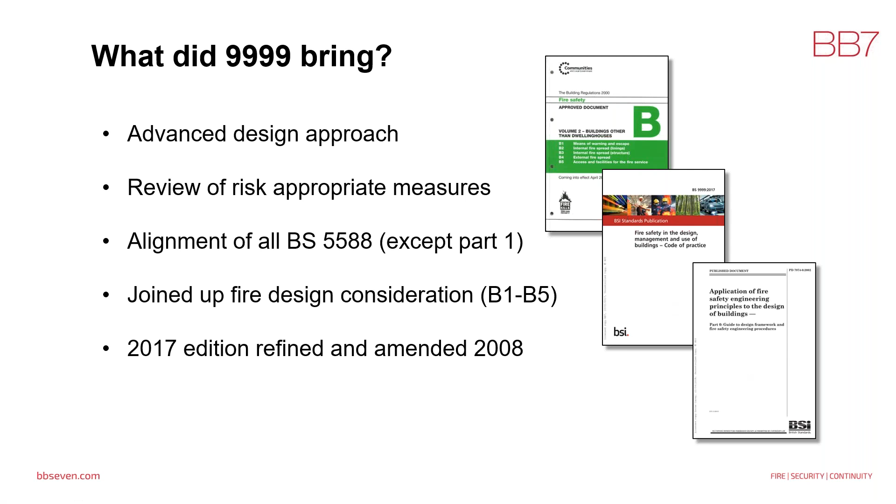So why would we look to apply 9999? There are benefits in applying the document, and one of the most common ones, certainly when looking from a retrospective point of view, which is asked quite a lot, is increasing occupancy within the buildings.

Certainly what the standard did was take into account that the risk of premises aren't the same, which ADB doesn't allude to, certainly within occupancy calculations. So ADB is very different to 9999 in that way.

The standard also gave us better design freedoms, with increased travel distances, smaller escape widths, decreased levels of fire resistance, just for a few examples - there are many within the document. So there are benefits with using 9999 rather than ADB for some buildings.

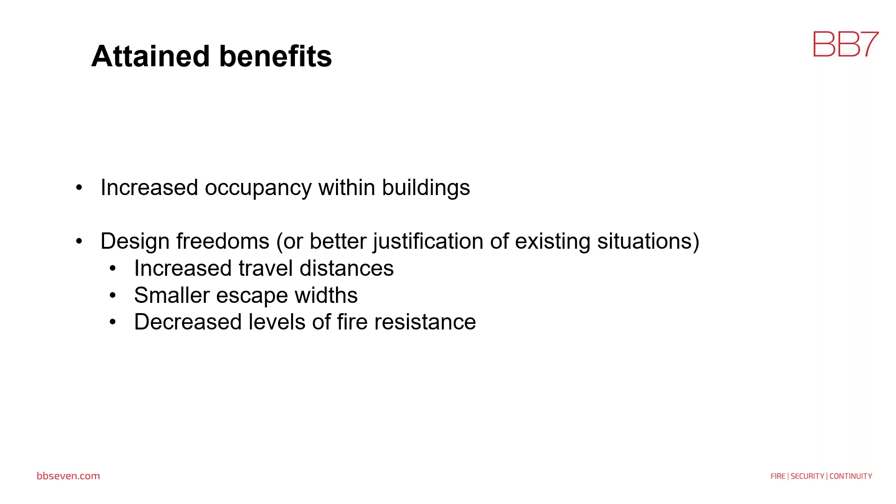So why would you look to do a retrospective application? Well, there's quite a few, but the main ones we tend to come across: there may be an extension or an alteration to an existing building. So perhaps the new design is using the standard 9999, where the previous areas of the building were designed to a previous design standard, such as ADB, and we might be looking to bring the whole of that building under the design principles of 9999.

Perhaps a review of occupancy - in fact, this is probably the most common one which we get asked to look at, particularly when looking at retrospective application. So looking at the increase of occupancy, very common within office environments, particularly in the city, where they want to put more people in the buildings. They'll look at ways in which that can be achieved. One of the most simple ways, without spending loads of money putting in additional escape routes, is looking to use 9999 to review the occupancy of the building as it currently is. There might be some considerations, which we'll talk about as we go through the document, but that's probably one of the most common things we get asked to do a review for.

Change of use potentially - with changing the use to a different occupancy, they might look to use some of the benefits from 9999. Perhaps as an installation of a new system, perhaps a fire alarm or sprinkler system.

Obviously, we know that the standard can give us better design freedoms by utilising those things. So that may be a reason as to why we're asked to look at something retrospectively. But also looking perhaps at existing buildings, like heritage buildings, clearly a heritage building built a long time ago is never going to comply to anything that we've got of today's standard, but using some of the principles of 9999, we might be able to get a heritage building to perhaps look a bit more compliant, shall we say.

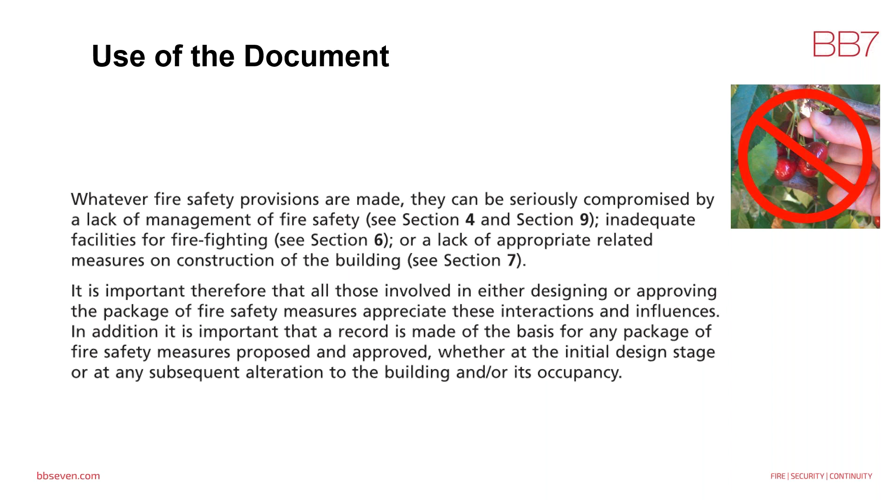Okay, so obviously when we're looking to review a building against 9999, we have to absolutely remember that the key objective here is to satisfy the functional requirements of the building regs and obviously the fire safety order, or other fire safety legislation as it may be in the UK, to ensure that actually we're complying with the law. It's not just about broadly trying to get a building to fit a standard because that works. We really need to understand, is what we do actually complying with the law? That's the key thing, what we're trying to achieve here.

So when we look at the standard then, the first thing really that we should be doing when looking to apply it retrospectively is understand how the building may comply with the baseline provision of what's required within the standard. So the first thing we sort of need to be asking is actually what are we trying to achieve from this review? When we think back to a few slides ago, we're looking at potential reasons why we may have applied this standard. Of course, we need to be thinking, what is the actual thing we're looking to achieve through the purpose of this review?

It may be, as is often the case, as we said, that it might be an increase of occupancy. Well, if that's the case, then the means of escape section is really critical, and that's something we really need to be considering, that everything complies within reason to the document. So it might not absolutely be necessary to have to apply all of the document in all cases. It may not be that a means of escape issue, or the bearing of a reduced or an enhanced level of fire resistance, might have any real bearing on the means of escape issues.

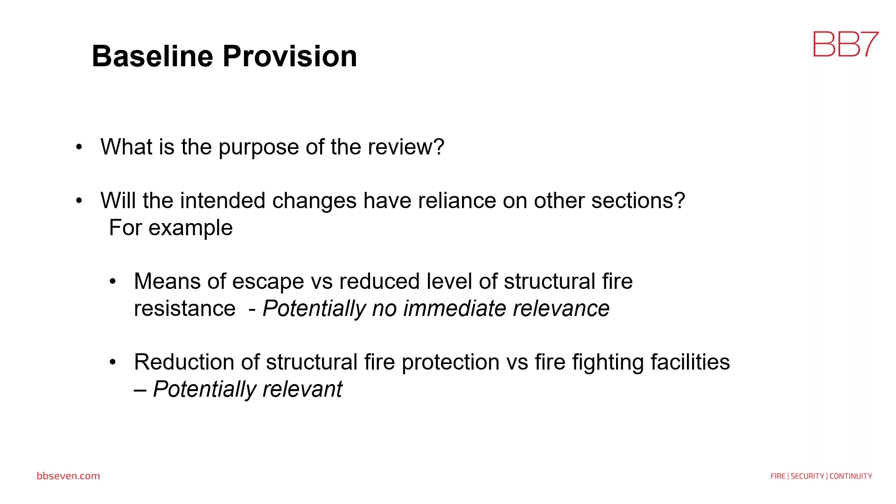But equally, it might be that if we're looking to decrease structural fire protection through a retrospective review, that firefighting facilities could be very relevant, actually. So it's really understanding, again, that interaction between the standards, understanding what the purpose of the review is, and then looking to apply the various areas of the document that are relevant.

Due to time constraints today, we're going to look primarily at means of escape. To go through all of the baseline provisions in the document would certainly take longer than a morning session, so we're focusing on means of escape just now. But you should get the idea of how we're looking to apply the document, how we're looking at it really.

Obviously, those of you familiar with the document will know the first thing you'll look to do is apply a risk profile to the building. How we do that, as most of you are aware, is by looking at what type of occupants are within the building - whether they're awake and familiar, awake and unfamiliar, or asleep, etc. These are some examples of where you may find these occupancy characteristics, but you'd need to assess the building to understand which one applies.

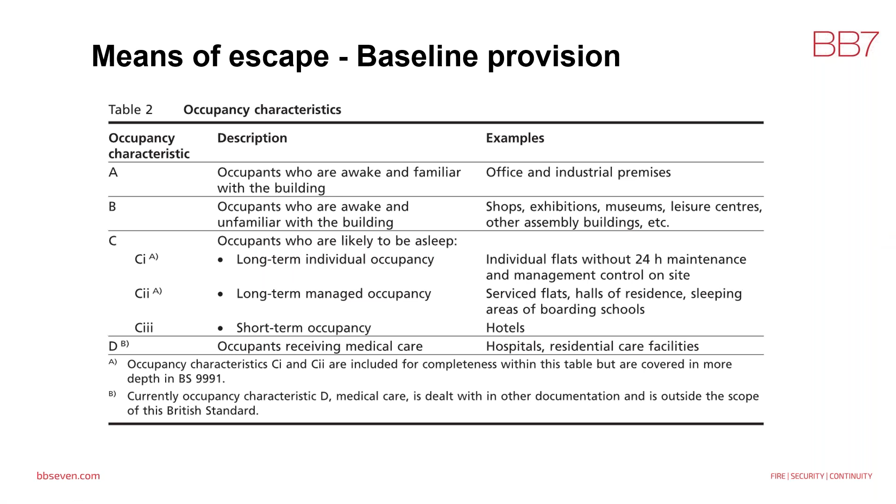Secondly, you look to apply a fire growth rate, 1 to 4, but it's key to note that we don't cover 4 within 9999 - ultra fast fires are outside the scope of the document. So in reality, we're looking at 1 to 3, based on how quickly the fire is going to grow within the premises.

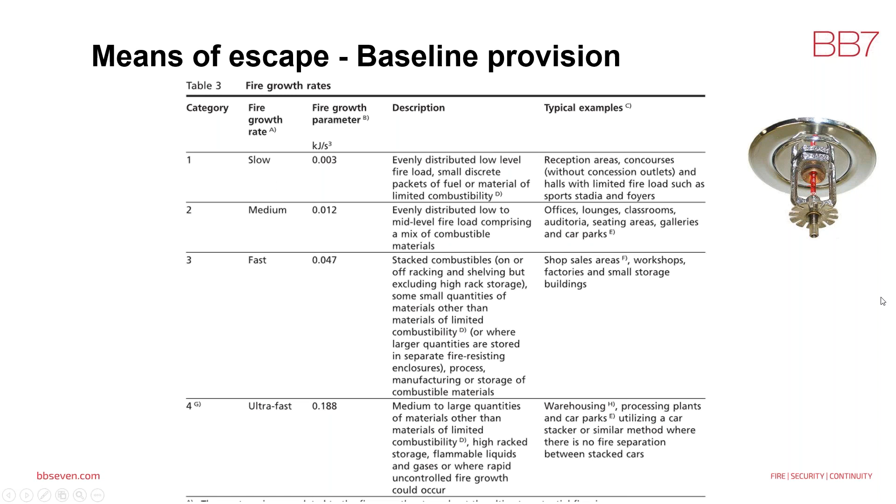The key thing to understand as well is that if the building is fitted with sprinklers - and they should be life safety sprinklers, which was changed in the 2017 edition of 9999 - you will actually drop a fire growth rate. So if you look at an office, for example, which would usually sit at fire growth rate 2, being medium, having sprinklers would actually drop that into a 1, a slow growth rate. So then you'd look at your risk profile here - if you had sprinklers, you drop into the lower category.

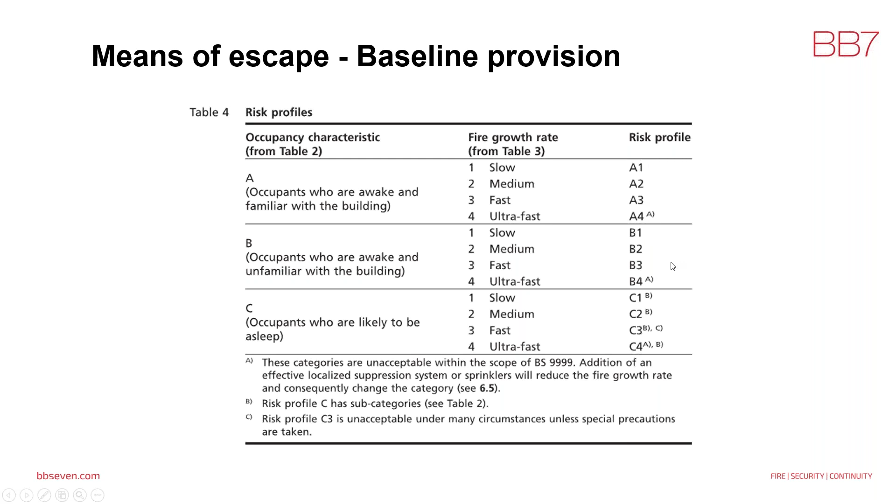What you'll end up with here is a risk profile based on what you've assessed - A1 to A3, B1 to B3, C1 to C3, whatever it may be. But that then sets the baseline really of what you follow through the document.

So the first thing we look at then is the fire detection and alarm system. Now, looking through the risk profile you've already determined, you'll notice that the standard applies a minimum acceptable detection and alarm system standard depending on the risk profile. So for an A1, a very low risk premises for example, a category M system might be perfectly acceptable under the standard. Quite often, in my experience, you rarely find Cat M systems being newly installed now, certainly not the case. But this will provide you the basic minimum acceptable standard required under 9999 - what we're looking to achieve when originally assessing the building.

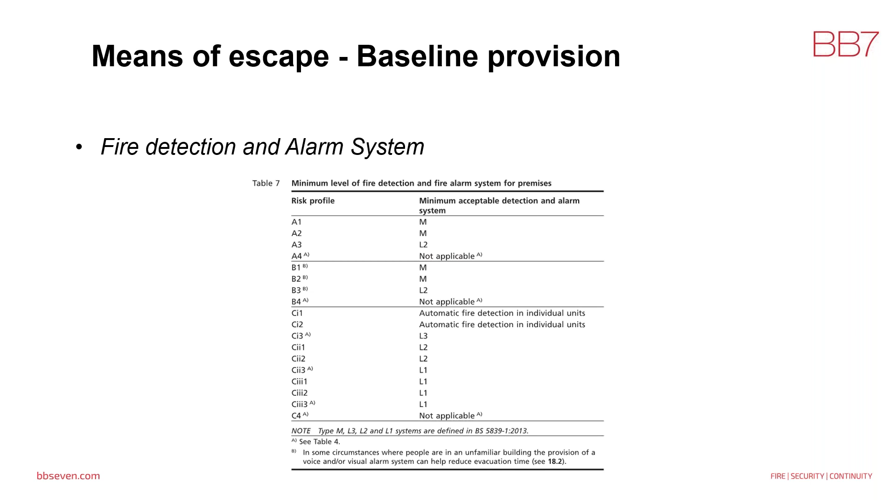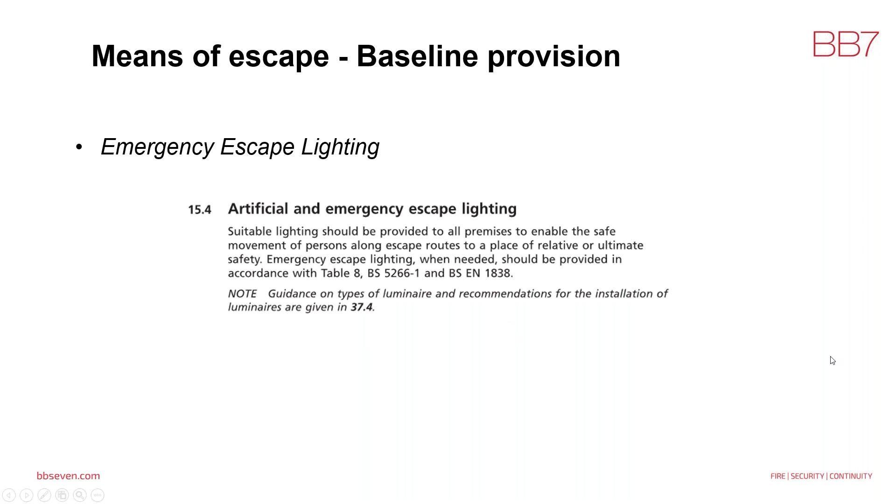Escape lighting, again, I shan't dwell on this too much - it's very, very similar to the requirement within ADB, in fact virtually identical. So it would be to the relevant standard, 5266, that's what you'd be looking for. And same with signs, very simple - any exit signs within the building should be compliant to 5499.

So then we start looking at perhaps door fastenings, direction of opening. Most of these, to be fair, are very similar to ADB, so we shan't go too deep into them, but ultimately all exit doors should be openable without the use of a key. If there are any electronic locks, they should be fitted with overrides to conform to BS 7273 Part 4, so that the electronic lock should fail safe - or fail to open, I should say - on fire alarm operation, loss of power, or a system error. They should also be fitted with a manual door release, the little green boxes to the side.

There are occasions, however, where manual door releases aren't fitted based on a risk assessment, being that the higher risk actually is a security failure rather than a means of escape failure. Something like a block of flats, for example - I know that's not necessarily covered in 9999 - but sometimes it's more favourable not to have a manual door release where it's going to be broken in 10 minutes and that door's going to be constantly open. So there are times where you can suitably justify that a manual door release may not be required, providing the system is configured in the correct way so that it should still fail safe.

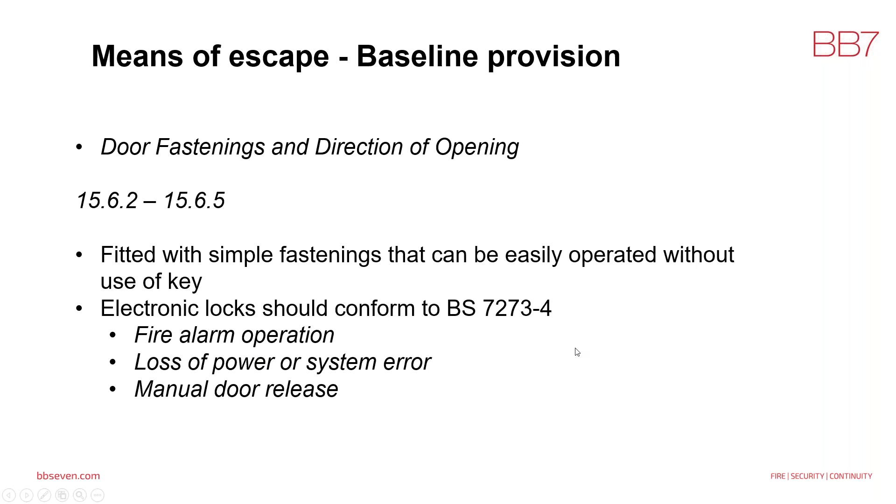Again, very, very similar to ADB. In fact, it's actually identical, I think, to 5.14 in ADB, where we've got door fastenings and the direction of opening of the door - that the door should open in direction of travel when you've got an excess of 60 persons, with the exception of any areas which may have rapid fire development. Now, that's not necessarily intended for kitchens. That's more for industrial areas where you may have very high fire loadings, or contain things such as alcohol or solvents, which might give very rapid fire development, where a quick egress may be required.

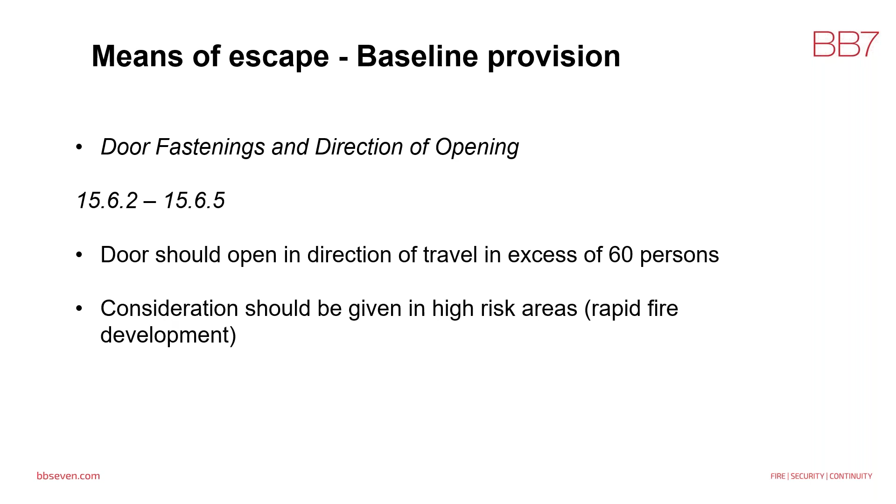So looking at the provision for final exits - again, very similar to ADB - but there are perhaps a couple of minor differences, particularly when we come to merging flow calculations. There are quite a few different examples of merging flow calcs within 9999, but simply, final exits should be sited to ensure rapid dispersal from the building. They should be easily apparent, and sited away from smoke outlets and vents. Sometimes that's a little difficult with existing buildings, particularly in the city, particularly with basement vents, but it's something we try to achieve if we can.

This is something which is slightly different within 9999 - the provision of having, if you have external steps, adequate space outside. So if a wheelchair needs to come through, it can be put to the side if there are other steps to climb, and it won't necessarily obstruct egress until we've got people who can assist to take the wheelchair or the wheelchair user upstairs.

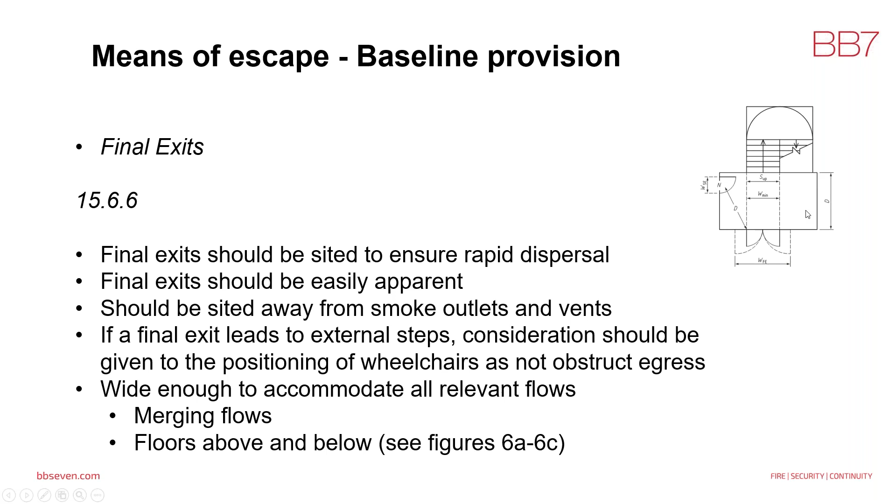Obviously any exits which should be provided, it needs to be able to take all relevant merging flows. There are three different merging flow calculations within 9999 - figures 6A to 6C. I'm not going to run through the calculation process today, but just be aware that they are there, and you may need to apply them.

Again, identical to ADB when we talk about the layout, perhaps the number of escape routes, defining how many people and the minimum number of escape routes you would ever require. That's quite simple - table 10.

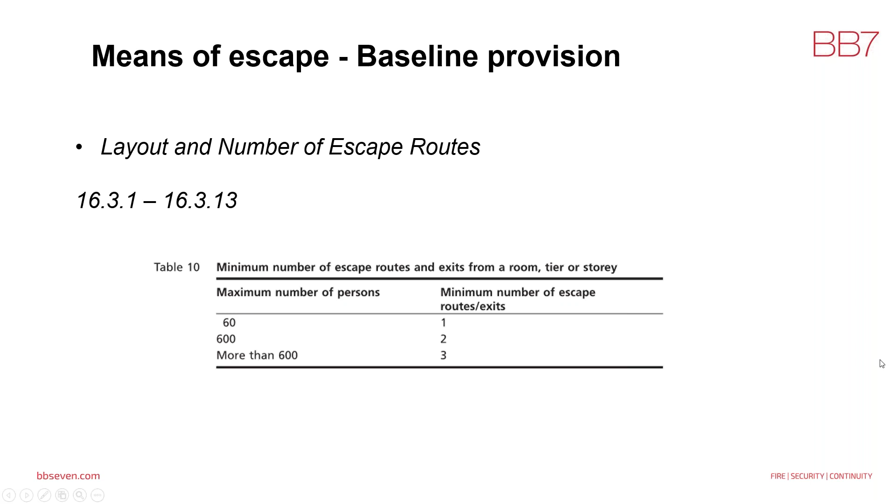This is slightly different - the old 45-degree rule. In ADB, as you know, the 45-degree rule and how it's applied is pretty much measured from the furthest point. If your exits are less than 45 degrees apart, then they should either be separated, made wider, or whatever. But 9999 approaches this slightly differently - something you can do is similar to the old angle of divergence, if anyone's old enough to remember that. What this effectively does is make the angle more acute, if you can combine travel distances. So if the distance between A to D conforms to a single direction of travel, and the overall A to B or A to C is still less than or within the agreed travel distances, then you can have an angle less than 45 degrees. Providing you measure your angle effectively from point D, from B to C, and providing this distance is no more than a single direction of travel, then it is allowable. That is a big difference between ADB and 9999.

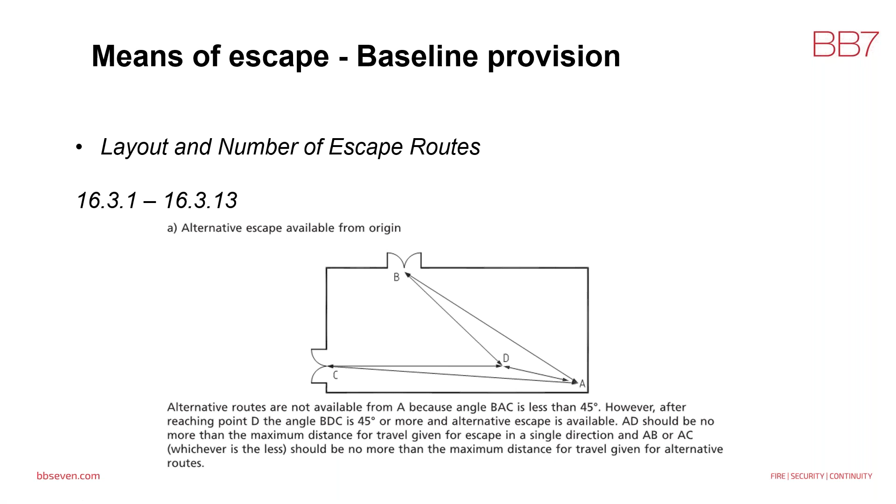I'll brush over some of these because this is quite a big section, but also things that are very similar to ADB. Obviously, a single escape route should not exceed more than 60 persons - we know that. Inner room considerations are identical to ADB, the types of control measures you may have there for inner rooms: detection, vision panels, gaps above walls to ceilings, etc.

Circulation routes as well, we obviously try to keep them away from stairways, exactly the same as ADB. And when we think about different uses and different occupancies, we try to provide different escape routes for different uses and occupancies, meaning really that we shouldn't be having escape routes pass through different occupancies. That's not really the done thing.

Height of escape routes, same requirement as ADB. 9999 gives a bit more description around corridors, about their enclosure, recesses, etc., around subdivisions. So it's quite good familiarising yourself with this area, just to understand if that could be relevant at all to what you're trying to apply it to in a building, particularly with a building you're applying it to retrospectively, are there any deviations or variations from the standard which are going to affect what you're trying to achieve? That's what that's looking to deal with there.

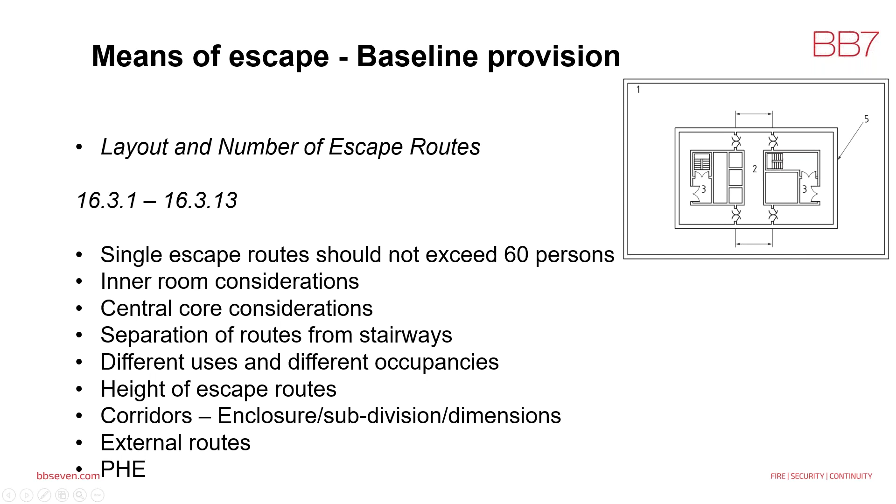Travel distances, obviously, you've spoken about a little bit earlier. Again, I'm sure many of you are very aware that in 9999, they're very, very different to what ADB would be, that they're all based on risk profiles, so having a direct or actual distance, meaning that you can apply the 2/3 rule as you would do in ADB.

So if you're measuring direct, you'd look at 44, or if actual, it would be 65. In reality, in existing buildings, this is the one you're going to be looking at, is the actual distance, actually measuring it. Direct really is only useful for design. So actual is where we're going to be interested, either 2-way or 1-way, just to ensure that they're pretty much within those limits. Again, not absolutely hard and fast, but near enough there.

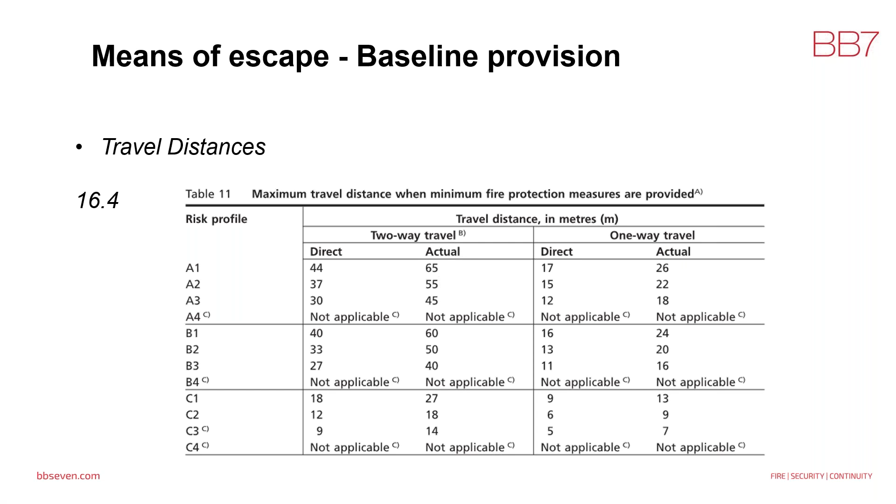Again, if we're looking a bit more at widths of doors and escape routes, again, slight differences here as well to ADB. That's probably the most important thing, certainly that they shouldn't be any less than Table 12, as we'll talk about in a minute. So the escape routes effectively need to be not less than the aggregate calculation within Table 12, which we'll talk about. But they shouldn't be less than 850, where there's a potential of wheelchair access. So it brings in some of the Part M requirements here as well, obviously, which ADB does separate a bit more, but 9999 does think a little bit more about disabled use.

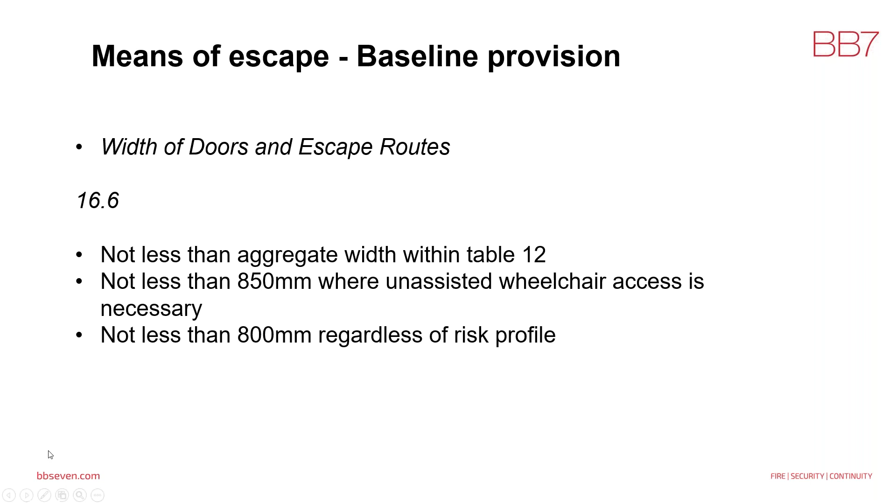Probably one of the most different areas here is this one here. This is quite important. 9999 assumes that every door will be at least 800 millimeters, which, when looking at existing buildings, can be a challenge, actually. Certainly, a lot of the buildings that I've looked at, some smaller office buildings, their doors are often less than 800 mil. So we have to apply a bit of common sense and some engineering methodology behind where we may have doors of 800 mil to see if it's achievable, or do we actually need to widen the door. So this might be a variation which we might have to look at when applying it retrospectively. 800 mil can be difficult to achieve sometimes.

So I mentioned Table 12 here. This really gives you your aggregate exit width. So effectively, where ADB, for example, might apply 5 mil per person, it will apply so many millimeters per person based on the risk profile. So if you've got an exit, obviously we're applying retrospectively, that you might have a 2000 millimeter wide exit, you just divide that number by whatever here you're looking to achieve to know how many people that exit can reasonably take. That's how you look to apply that.

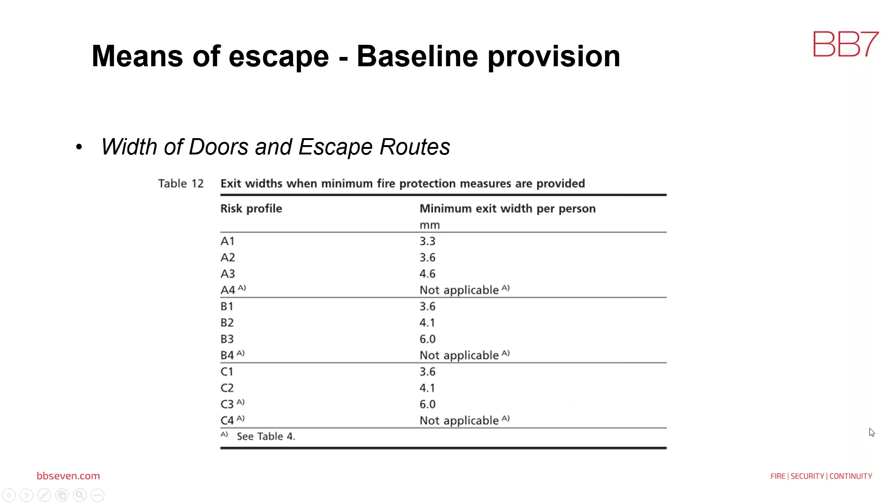A big difference between the 2008 and the 2017 standard was equation 1. Now, there's many theories as to how this actually happened, but what the 2008 standard of 9999 did was allow you to apply these standards to any width of door, up to 800 mil effectively. So you could have an 800 mil door and you just divide it by these numbers, which would actually give you a very high number of people potentially using an 800 mil door. So this was recognized in the 2017 standard, and they put a reduction on it similar to the interpolation rule within ADB.

So what we do now is, if there's any door less than 1050 millimeters, the approach we now take is equation 1. We take 500 and divide it by this figure. So for any door less than 1050, that's what we do, which will give you the number of persons that the door can safely accommodate.

We'll go into this a little bit later, to how that looks with existing buildings, and also buildings which may have been designed quite reasonably to the 2008 standard, where there might be a massive difference now in occupancy calcs. We'll look at that in more detail further on.

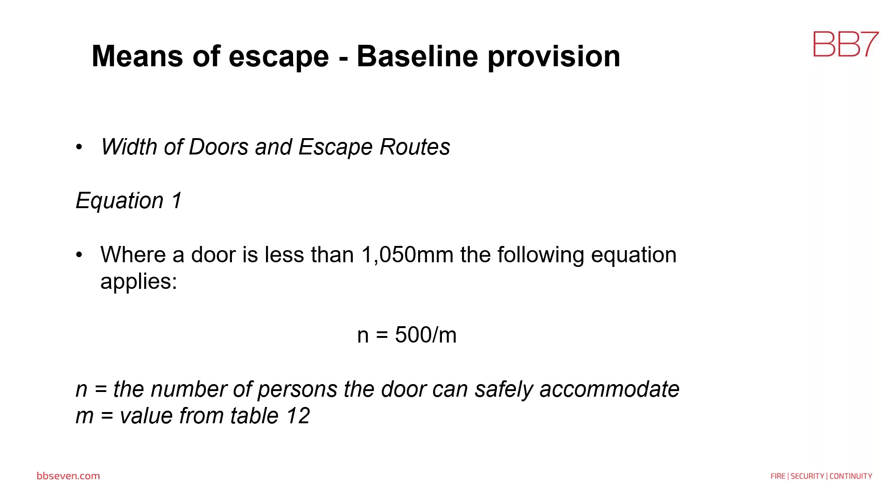Something else we have to consider is corridors and escape routes. Again, these are baseline provisions of 9999. Similar in requirements, the corridor shouldn't be any less than the calculated exit width we've just done, or by no means less than 1200, unless you've got a building where you won't have wheelchair access, in which case you can go down to 1000. If you've got any pinch points, say cross corridor doors, they shouldn't be less than 150 mil than the corridor - that's how much you can pinch into it.

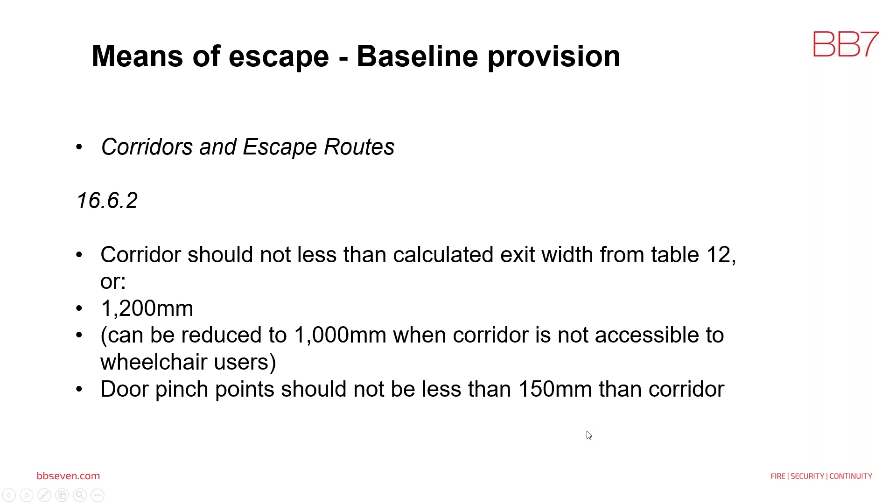So if we move into vertical escape, starting to look at staircases, this is approached in a very similar way to ADB, but with a slightly different calculation methodology because it approaches things in risk factors rather than ADB, which just looks at it quite simply.

Some other similar requirements to ADB apply around limited combustibility, with the exception that it applies down to risk groups. So rather than saying just residential or whatever within ADB, it's looked at by risk groups instead. Limited combustibility is defined within the standard, and it's worth looking at that to ensure you understand it - quite often it's confused with just meaning class 0. That's not the case. Limited combustibility can be various materials, providing it falls within certain test parameters defined within the standards. I'd advise you look through that to understand what it means when applying it in an existing building.

Slightly different is how external wall protection applies to staircases. It should be 1800 mil fire resisting construction within staircase walls, for example, if the angles are not more than 135 degrees. Effectively that's trying to reduce the radiant heat from an angle of a window opposite the staircase coming onto areas where the staircase may be. But if that angle is more than 135 degrees, it's assumed the radiant heat will be negligible on the area you're looking at.

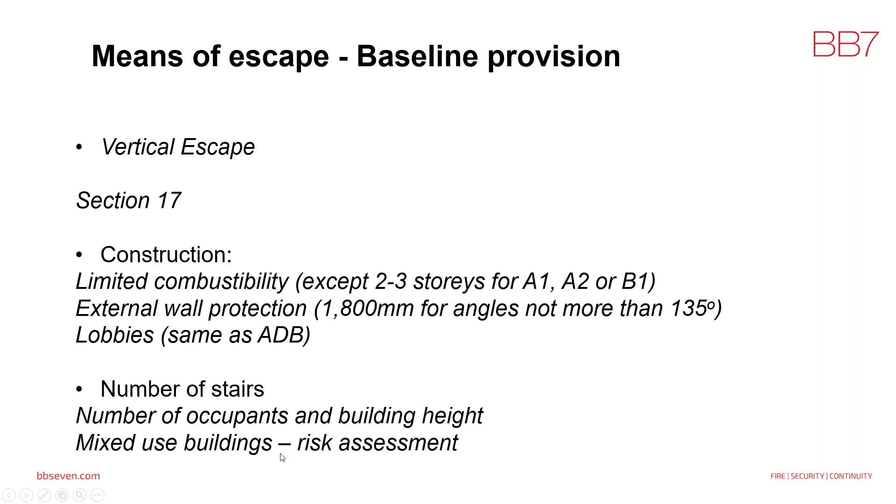This is the equivalent of table 7 of ADB, so table 13 in 9999, done in a similar way. Obviously the difference with ADB is that the figures are all set - you'll have the numbers of people based on the number of floors based on the staircase widths. That's what you do within ADB. But within 9999, because of risk profiles, it has to be a little bit more complex. Effectively what you look at is applying an amount of width per person for the amount of floors against a risk profile - done in a similar way, just slightly different.

However, when you look at retrospectively applying it in reverse, there are considerations we have to be aware of, which we'll touch on in one of the case studies. So we'll talk through that a bit more then.

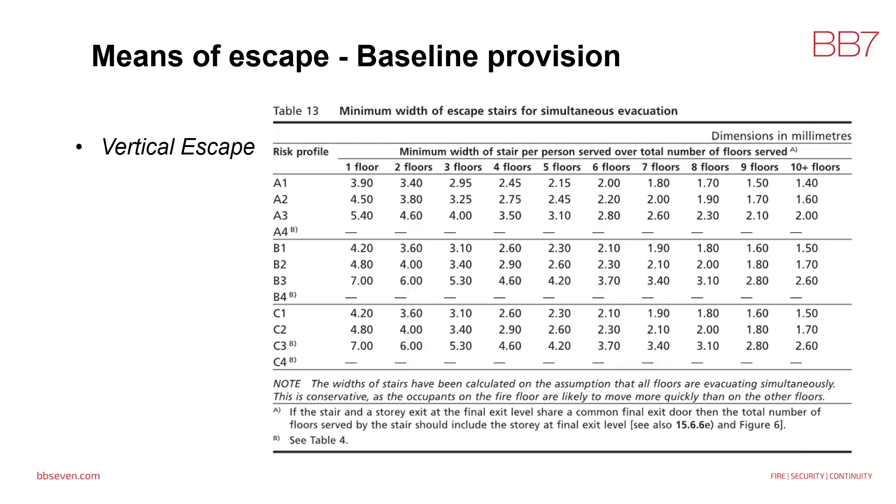If you've got a building with phased evacuation, unlike ADB where you've got just a table that tells you what you should be doing for phased evacuation in terms of widths, we generally assume 2 floors evacuating on a phased evacuation. So what 9999 does is steer you down the route of ensuring that you use this figure here, effectively the 2 floors for a phased evacuation.

Again, stairs going into basements, very similar to ADB. The stair should always really be separated from the main stair unless we've got smoke control systems, or if it's a small building, less than 11 meters, with a fire resisting lobby at the basement lobby, or a separation of the basement level in the staircase - a physical screen effectively within the stair. For small buildings that's allowable, but for larger buildings we can have one stair that goes down to the basement if the basement lobby is vented. That's what we'll be looking to achieve with that.

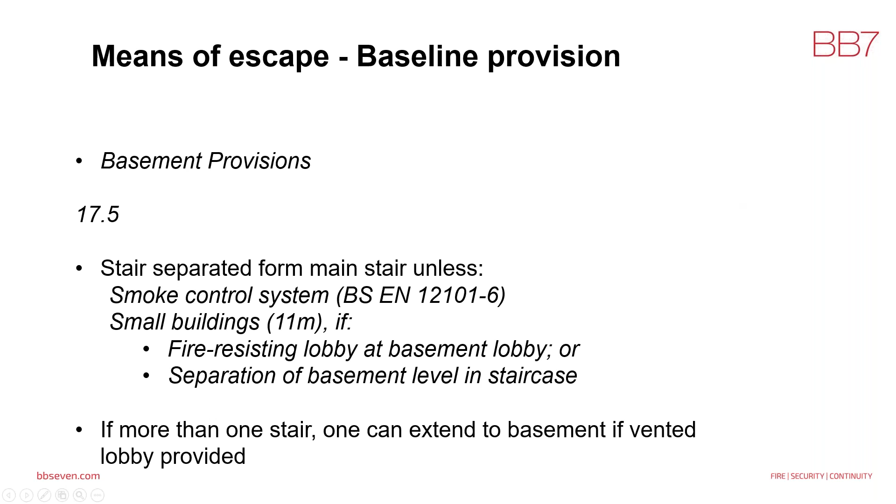So they're really all the main physical things that we'd be looking at in terms of the baseline provisions to see if the standard can apply. Is it massively outside of this, or is it broadly where it needs to be? But perhaps one of the most important things really, which sits within 9999, is this area, and that's management.

Management was actually quite bolstered up within the 2017 edition because what it recognised was the management levels within the 2008 standard didn't quite do what they were meant to, and arguably it was impossible to achieve level 1, which was apparently the best standard, and level 3 didn't really comply with the legislation. So that needed changing. So what we came up with really was 2 management system levels.

Management system level 2 means that you comply with the absolute minimum requirements of the legislation. Quite simple, you'd think. However, from my experience of auditing organisations, and certainly as a case study we'll look at a little bit later as well, I've never found an organisation that fully complies, to be honest.

There's always something which might need a little bit of work to get them where they need to get to. So that being a requirement - at least being level 2 - that you'd be doing a management assessment, and it's really important, particularly when we're looking at putting large numbers of people above what standards guidance would allow. We need to ensure that management is really, really good to ensure that they're not putting those people at risk. So it's really important that we assess fire safety management well.

There is also management system level 1, which is enhanced. It can give you some benefits within the document, especially if you're looking to say have any variations from the document. We'd be looking at a significant demonstration of good management, and the way that the document requires that is conformity with a management system such as PAS 7. So we'd be looking for a very much enhanced level of management, which goes above and beyond the requirements of legislation. But certainly with any retrospective review, we would definitely be looking at ensuring that the management's good, effectively.

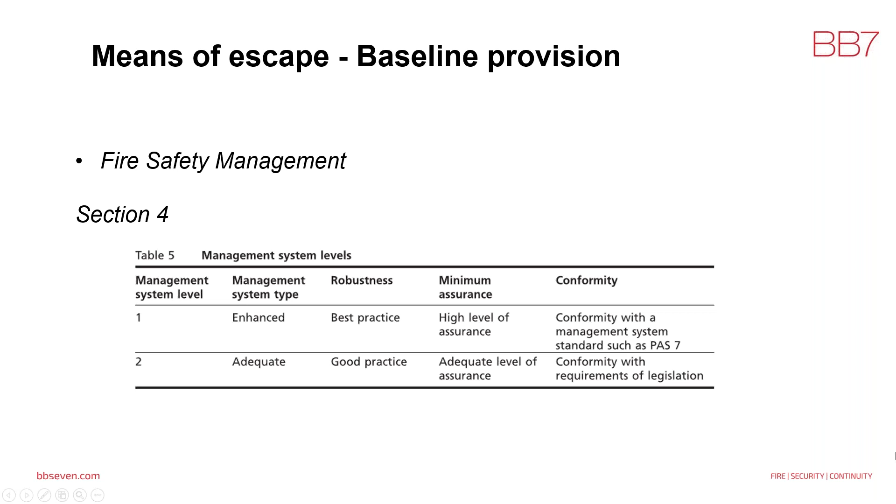So what if you've got a building then that doesn't comply to any of the baselines which we've just spoken about? Well, of course, there's a few things to consider around this. We obviously want to avoid the cherry picking aspect, but equally we might need to do a risk assessment to see how much of a bigger deal it is when we're looking at all the other areas of the building. So, of course, the first thing we need to be asking is, does it satisfy the functional requirement? Now, it may not always be possible to determine that without further work, but that's obviously what we're looking to achieve, as we said earlier.

It may be the case that perhaps we need to engage with the fire engineer. Perhaps we need to start doing something a bit more advanced, and it might go a little bit beyond what 9999 requires, but might be still using the principles. But of course, we do have to ask ourselves, actually, is 9999 suitable to actually put to this building? I'm not sure - there have been some buildings before we've been asked to look at from 9999, and reality is it's just not so suitable. There are some types of building, particularly when management is just so far off, that it just doesn't give you the confidence that applying 9999 is a good thing to do.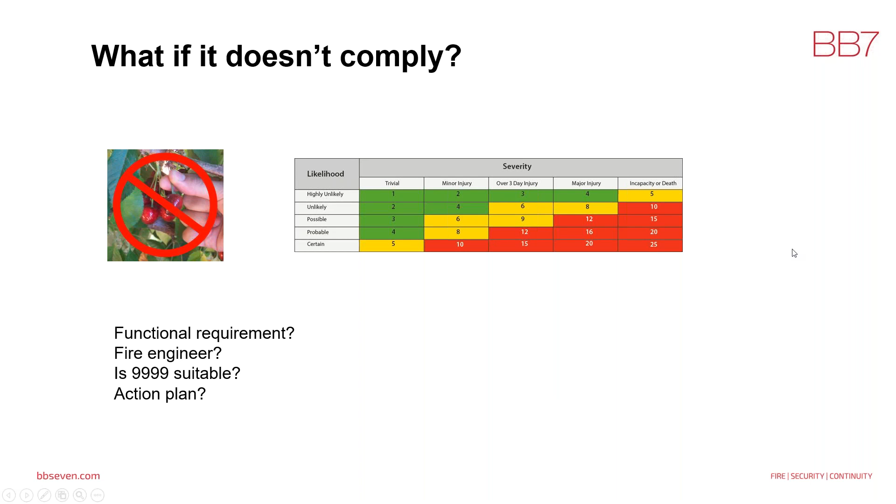But it might also be the case that you put in place an action plan as well, so if you could, in theory, apply BS 9999 if you rectify these issues. So that's something you could do. That's the sort of approach you'd want to look at if you have a building which doesn't comply fully with the standard.

I said we'd come back and look at this, because this is quite the case with what you might have in a building that doesn't comply with the 2008 versus the 2017 standard. Most of us who are familiar with the standards know that a building designed to the 2008 edition of BS 9999 wouldn't comply with 2017. It would actually be quite different.

So I think we have to ask ourselves, from the legal point of view, what's reasonable in the circumstances. Could we do a risk assessment to ascertain if this increase in occupancy is okay, or if it's not? Obviously each building is going to be dealt with on a case-by-case basis.

But I think the way we have to look at this, taking the legal point of view, is: is it any different to when guidance has been changed or superseded in the past, where the standards have been so far different? For example, CP3 versus BS 5588 Part 1 - when we consider what the smoke ventilation requirements were within flats in CP3 compared to what they are now.

They're hugely different, and that's been recognised in the production of risk assessment guidance, the purpose-built blocks of flats guides, and certainly the principle we would apply would be very much the PAS 79 approach to looking through this. Now it may be that your assessment of a building under the 2008 standard leads you to think, no, this is really iffy.

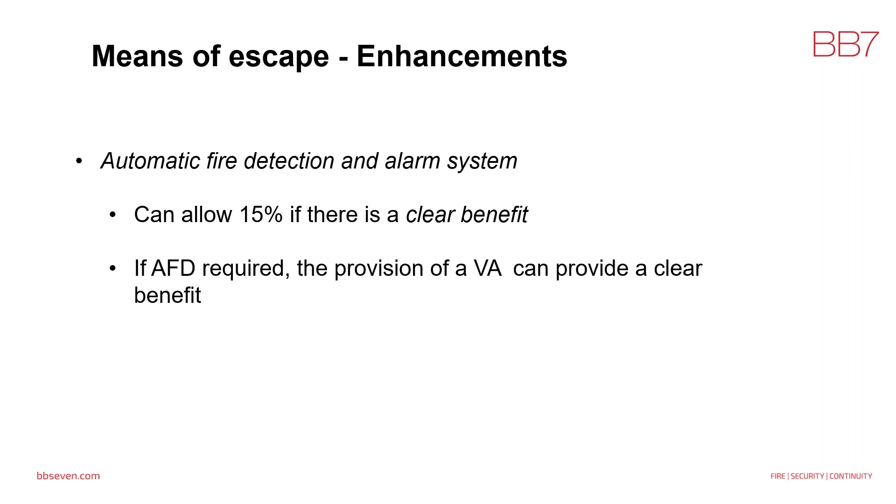Also, if you've got automatic fire detection fitted, you can also apply that same enhancement if you've got provision of a voice alarm system. And that voice alarm system can usually be of clear benefit - I think you'd struggle to find a situation where it wouldn't provide a clear benefit. So that 15% can actually be applied as well.

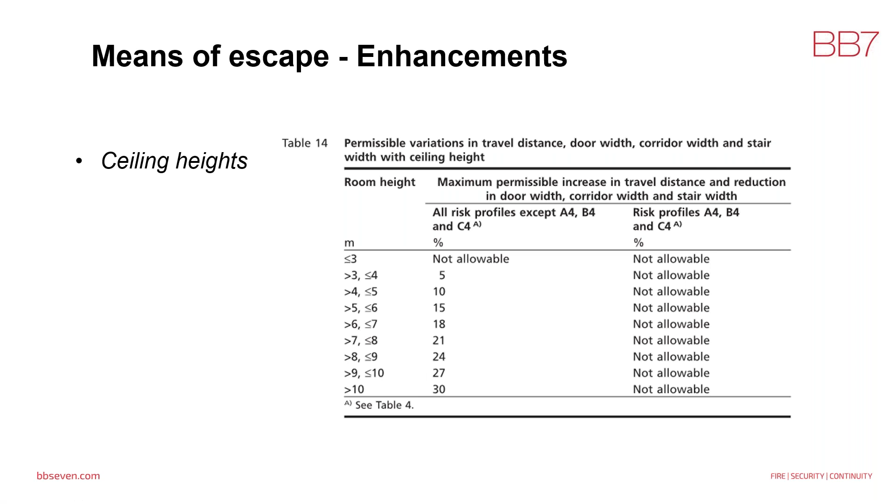Something else you can look at is ceiling heights. Depending on how that ceiling is, you can apply a percentage, same as the AFD with the 15, looking at reduction in escape width or increase in travel distance based on ceilings. The theory being that smoke goes up quite high, so it takes a long time before that smoke layer comes down and affects means of escape.

But the key thing to remember with applying any of these enhancements is that there are maximum limits. So look at table 15 and table 16 within 9999 to make sure you don't exceed the maximum limits when looking to apply those enhancements.

Okay, so that's a bit of a whistle stop really as to how the principles in which we would look to apply 9999 in a retrospective way for means of escape.

Now I'm just going to take you through a couple of quick case studies to show you perhaps areas that didn't comply and the approach taken to it, in ways that you can apply a bit of a fire engineered approach to something, and also just understand how it can be applied.

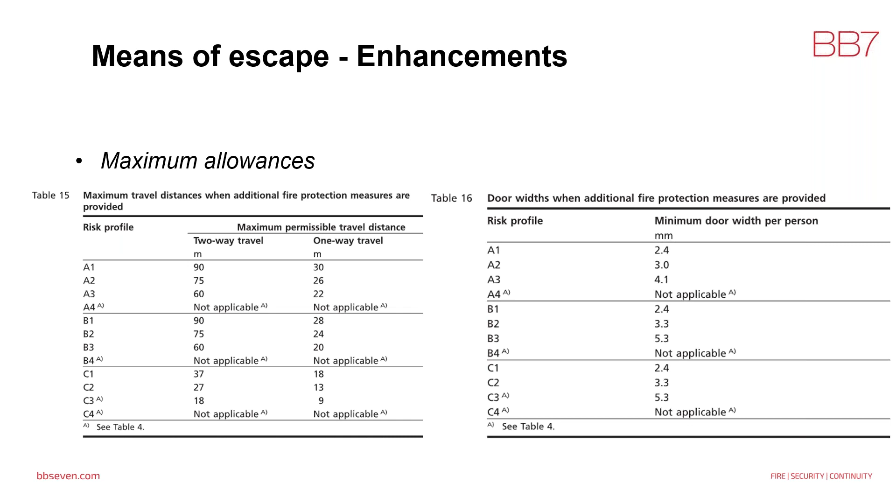I think it's worth noting that something we very much talk about in our reports when looking at occupancy is that it's usually something else which would actually limit the occupancy rather than 9999. It's quite often a health and safety or welfare issue that would apply so many people per square metre, for example, just because of air conditioning requirements or something like that. Quite often that's more limiting than what 9999 is, so we're very clear within a report that that's something else and other considerations.

Certainly, there's also the potential argument whether or not building control needs to be informed - is it or is it not a material alteration? We always advise clients to inform or go through a process with building control, and from my experience, half actually treat it as a material alteration and some don't. I would always play on the safe side and tend to advise it is a material alteration, but half do, half don't in my experience.

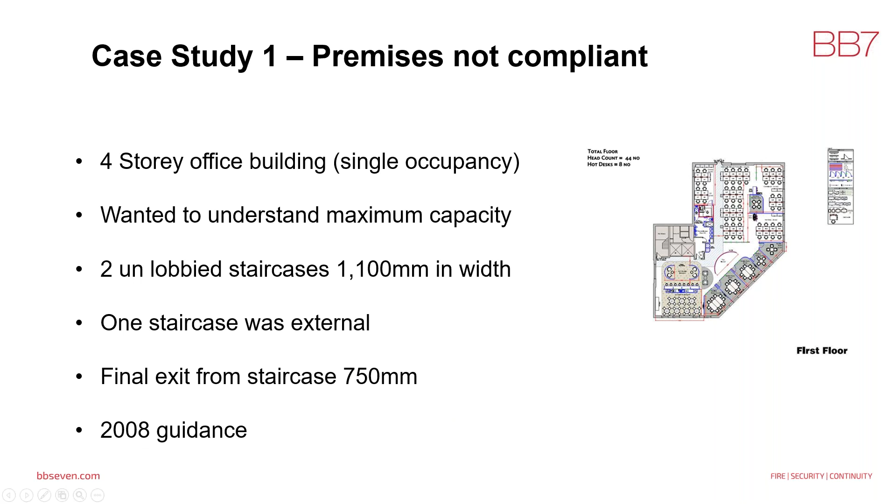So there you go, there's the full layout of the building for these ones - so let's show a bigger one of the ground floor. Sorry, it's first floor. So yeah, you've got the one staircase there, sat unlobbied. You've got the typical floor plate which sits on the 3 upper floors, and a door which opens out there. Both outward opening, as you can see, but an external staircase sat just there. This window was fire resisting, incidentally, as well.

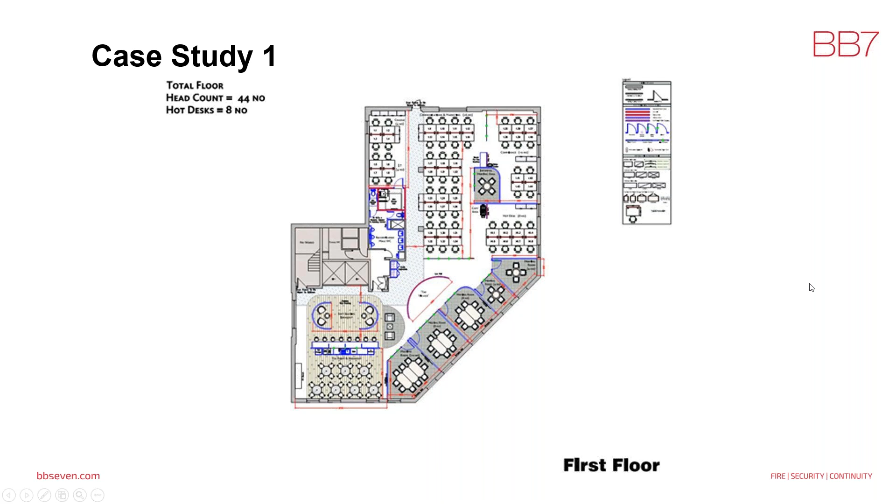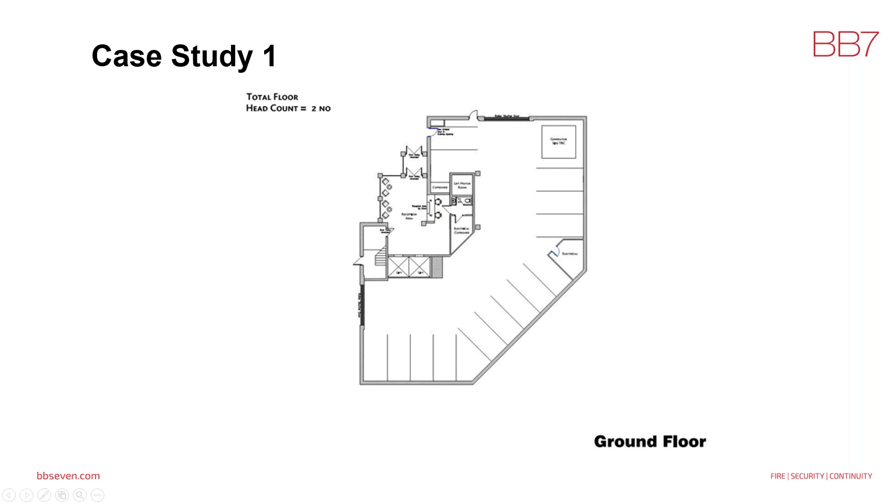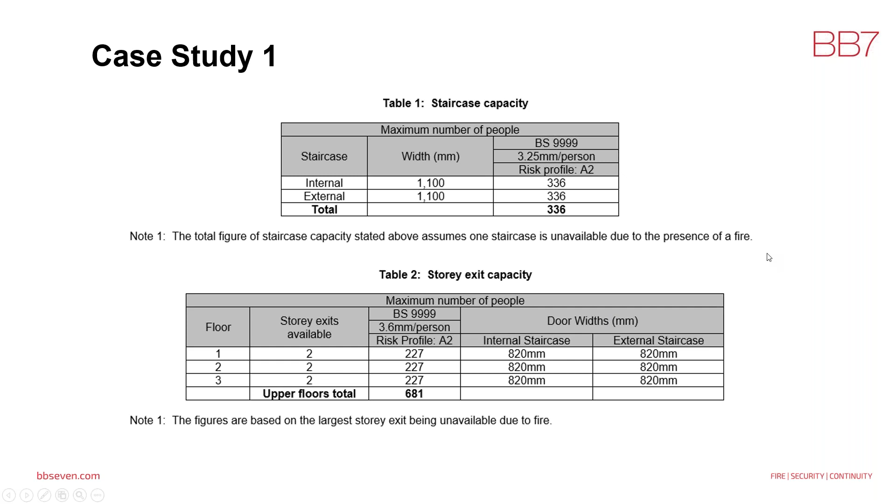Applying the principles of what we've just spoken about, the limiting factor was the stair width, so 336 persons within the building. There was an L2 fire alarm system provided through the building, but being so small and open plan, I really didn't think it provided any clear benefit, so we didn't apply the 15%.

The big issue here really was the final exit door, which was only 750 mil, where the stair was 1100. Obviously that's not great anyway, it wouldn't even comply with ADB. So how this got through, no idea. It wasn't that old, the building.

But the key thing we did acknowledge was that there was an additional exit available from the stair to reception. Not ideal, but applying the design principle of one fire in one place at one time, if people are evacuating from the upper floors and the fire's in reception, that gives you a fair bit of time before it impacts the staircase, although the reception was incredibly low risk in this case. Equally, if the fire's on the floor plate, there's no reason the reception can't be used as an additional means of escape. So that's the approach we took.

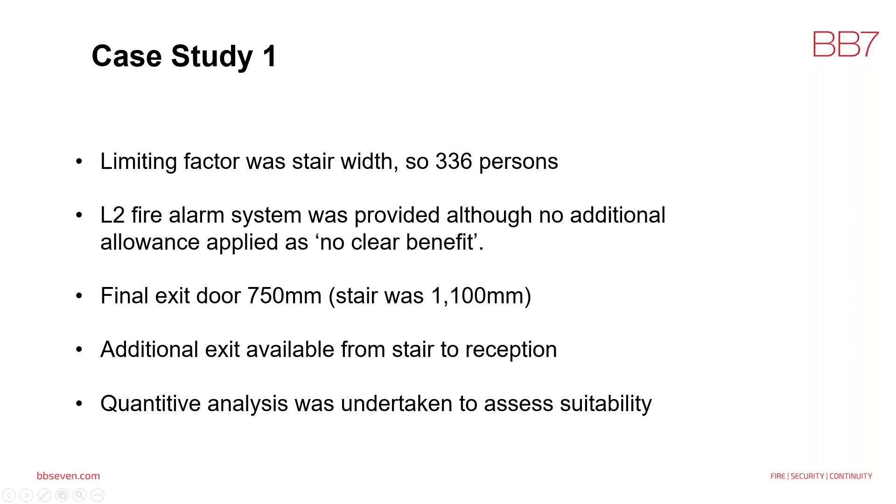So applying the principles, looking at what the staircase can actually handle—this is going a little into fire engineering principles, to be honest. You can see table 7 from ADB versus table 13, it's very different in how it applies. When you look at how a staircase works, unlike a horizontal exit, a staircase applies a storage capacity and a flow rate.

That's how these numbers are derived—how many people we can store in the staircase as well as flow into it, that's how staircase counts work. Within ADB it's quite simple, because these numbers go up on a uniform number. So for example, with 1100 mil stairs, we know 40 people per story the staircase can handle. We know that as storage, not flow.

Where if we look at how it works in 9999, it's actually not uniform when we look at how it works over the floors—the difference from here to here to here is different. So we have to apply this calculation to understand how many people we can store within the staircase. The best way is to always work at worst case, so we're looking at an A2 risk profile. We know the storage capacity between 1 and 2 means less people, so 45 people—that's worst case. So 9999 allows 45 people per story compared to ADB.

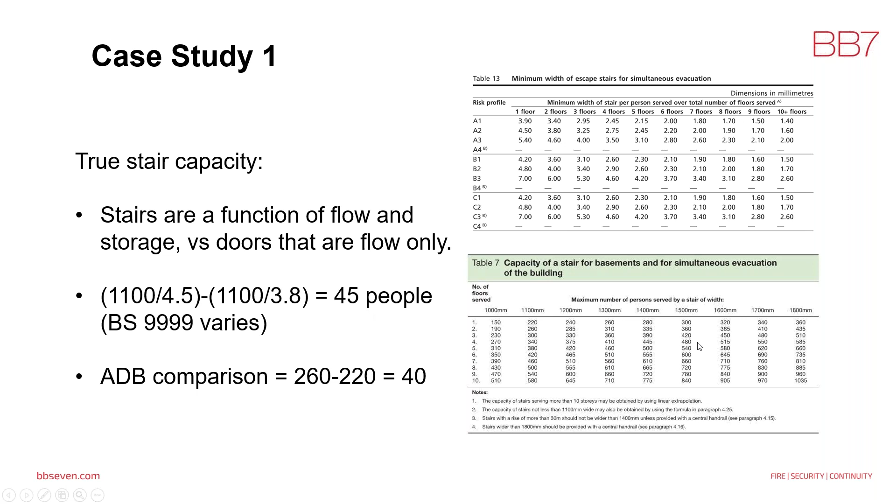Applying that principle, we know the storage capacity of the staircase is around 135 persons. We also know the stair capacity is 336. So if we take 336 and take away this number, that means in order to clear the floor plates within the normal evacuation time of 2.5 minutes, we've actually got to have escape provision for 201 people at ground floor.

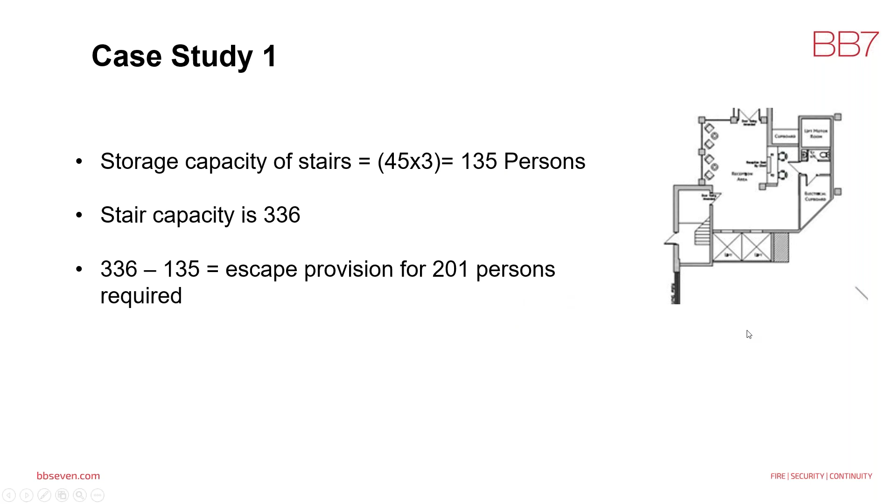So applying the 2008 standard, as we would have done at the time and as we did because it was allowable, under 750 divided by 3.6, noting the minimum should be 800, would give us 208 persons on one door. But noting we've got two 750 doors, generally thought allowable, with a case of 50 mil on a door, gives an escape capacity of 416 people. You can see it's nearly double—it is double what's required. So it's over double from 201.

So in this case, having the 1500 mil escape width was considered reasonable, but it's absolutely clear it wouldn't have been acceptable under the 2017 standard to do it that way. If we look at 2017, applying the same methodology, it would have given escape capacity of 276 with these two doors. We believe there'll still be a sufficient margin of safety to account for a 50mm difference, because it might slow down fractionally, but not a great deal.

So that's case study 1. That was really just homing in on this particular issue around an area that didn't comply with the standard, but applying a bit of a fire-engineered approach, we can justify that in that case it was okay. Second case study, a bit of a bigger building, this one.

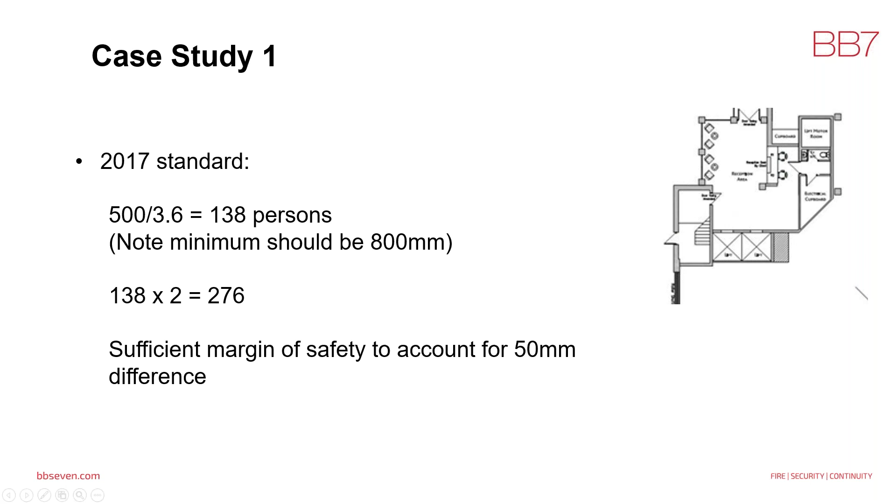It's quite a large building - an 11-story office building, and it's multi-occupancy, which is a big difference. But again, they wanted to understand the maximum capacity. This particular one had a 4-lobbied staircase, all 1200 in width, and it had a sprinkler system as well. It's a phased evac building, with an L1 fire alarm with a VA system. It also had a central atrium just here, which is actually very relevant.

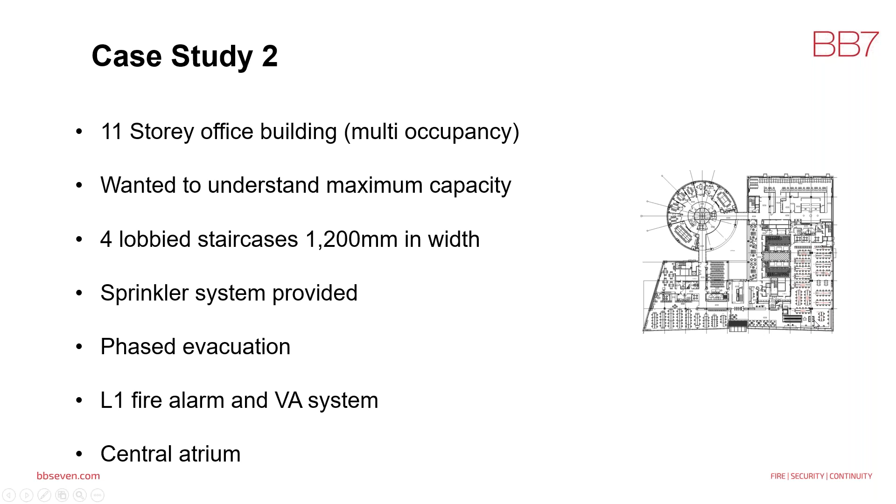The client in this case occupied 4 floors. So within about midway up the building, they had 4 floors sharing part of the central atrium. But the baseline provisions, when we looked at what was physically there within the building, it actually complied - it was fine, no variation from BS 9999. But due to the complexities in the building, rather than just dipping the toe in the water of management, this really required a full management audit to ascertain if they complied with Section 4 of 9999.

So this is what we come up to within the building - an A1 risk profile due to sprinklers, giving us a 3.3. That's what the staircase capacity was, and that's what the story exits were coming out to. Story exits were 374, so with 4 staircases, taking out 1 was giving you that per story.

Then looking at stair capacity, again same principles, but of course the key thing here was it was actually phase evacuation. So we're looking at 2 stories, which would give us this number. Then divide that by 2, and you'd be looking at 830 persons per story - that's what your story capacity would have been in this building.

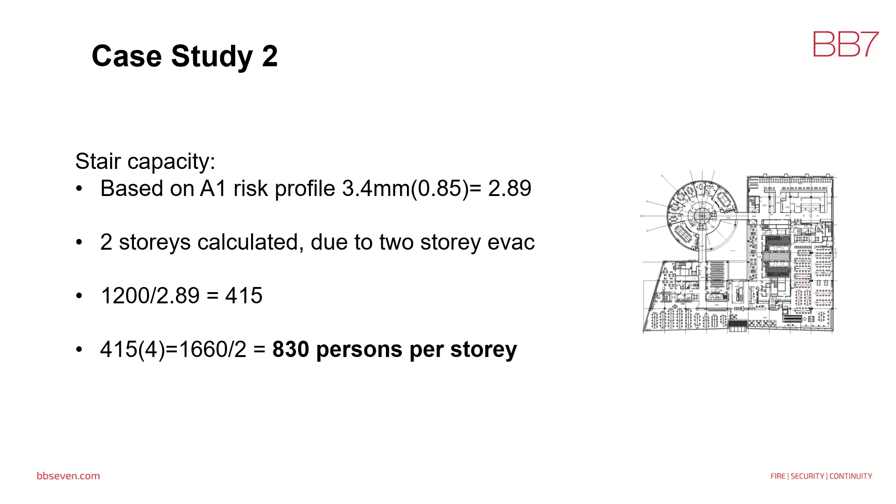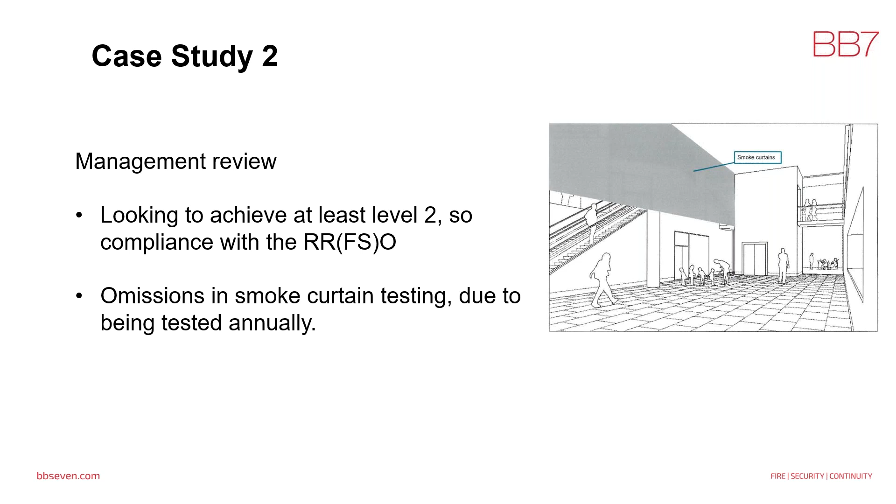But the key thing I wanted to highlight with this case study was the management issues. The management generally was pretty good, to be honest, but when looking at level 2 compliance with the fire safety order, the atrium was fitted with these smoke curtains you can see here. Being phased evacuation, they're a means of escape system, and as a means of escape system, they should be tested weekly - but they were actually only being tested annually in this case. So I couldn't conclude that they were complying with the requirements of the fire safety order.

But generally, they could achieve 9999, had no issues with that, and it wasn't an issue, to be perfectly honest. The main issue was the management that was a concern.

But due to this being phased evacuation as well, it wasn't really considered necessary to look at the other occupancies. If it's a simultaneous building, you would have to look at other occupancies to ensure their numbers are okay. Where it's phased evac, it was only actually evacuating the client's affected floors at any one time, so the other areas wouldn't have applied. But certainly if you're simultaneous, you would need to try and look at all the numbers of the building.

And there's the case studies, and that brings me to the end of the presentation. As Katie said, this is a pre-recorded session, but if there are any questions, get in touch either through Katie or myself, and I'll be happy to answer them.